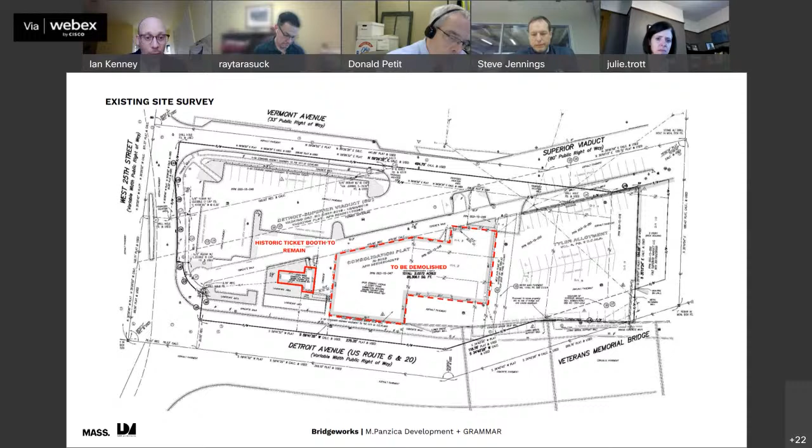And here it is. This is the historic ticket booth, and it's seen better days. But part of our proposal will be to restore this structure.

To set the site here, the ticket booth is the structure closest to West 25th, and the admin and garage building is further back on the site. What's important to note is that the garage building, the portion closest to the bridge, is actually cutting off access from the intersection of West 25th and Detroit Ave to the underbridge access, shown to the right-hand side of the page. As the bridge rises up and that existing parking lot sits at grade, there's an opportunity to get under the bridge, and we hope to open up the site for the public to move through it. Demolishing this building will be part of achieving that.

So here it is. We are proposing a mix of affordable housing and hotel programming, with generous public amenity on the ground plane. We hope to create a publicly accessible plaza and move the public through the site in a number of different ways, and to create a face of the project for folks arriving from any direction. This being a site with frontages on three sides, it's important that we create a welcoming face to the project on Detroit, on Superior, and on West 25th.

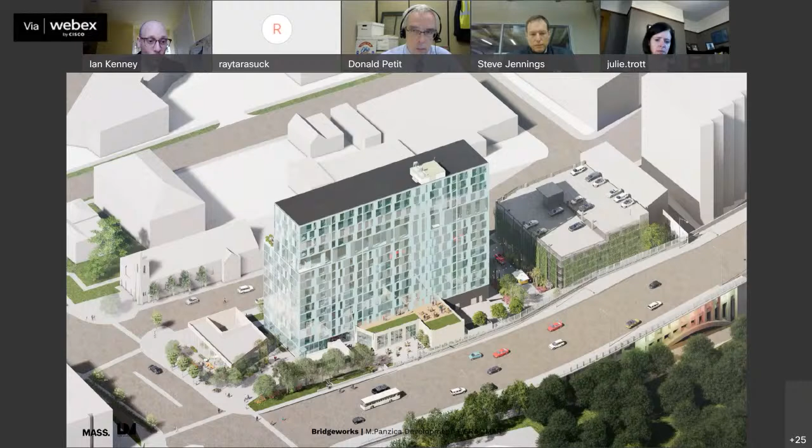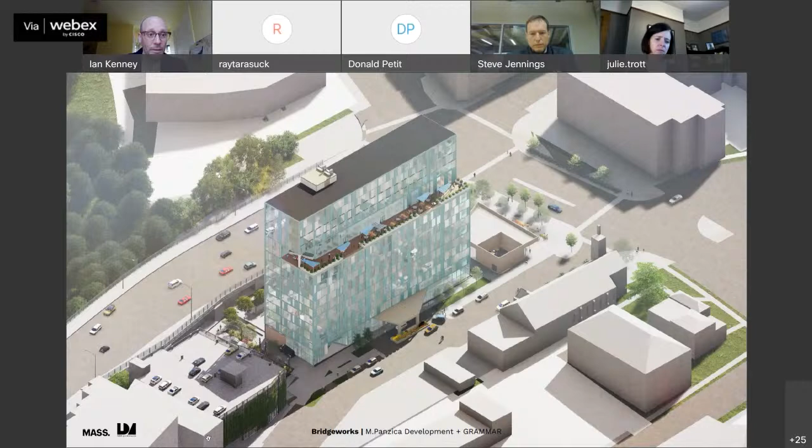Looking at the Superior Viaduct side of the building, this will be our main ground level entry. The hotel lobby and drop off will be right here. What we see on the bottom left of the page is the separated freestanding garage, a design that's evolved over the last year. By separating the garage, we're able to create a plaza that fully wraps around the residential and hotel building, increasing the public's ability to circulate through the site.

And here, as we look at the ground plane, the bridge is on the bottom of this page, and Superior is up top. We see the 1939 ticket booth remaining. What we're able to do here by demolishing the garage is allow the public to circulate from the corner of West 25th and Detroit on a hard and softscape plaza, bringing some of the programming outdoor in the form of cafe seating adjacent to our hotel lobby and coffee bar, and bring people down to that plaza to the page right.

The underbridge access is just beyond a little bump out of the bridge at the bottom right-hand side of the page. So to be able to move the public through the site and have people circulate, entering from a number of different directions, and open it up to all the adjacent neighborhoods, we thought was a really great opportunity that we want to make the most of.

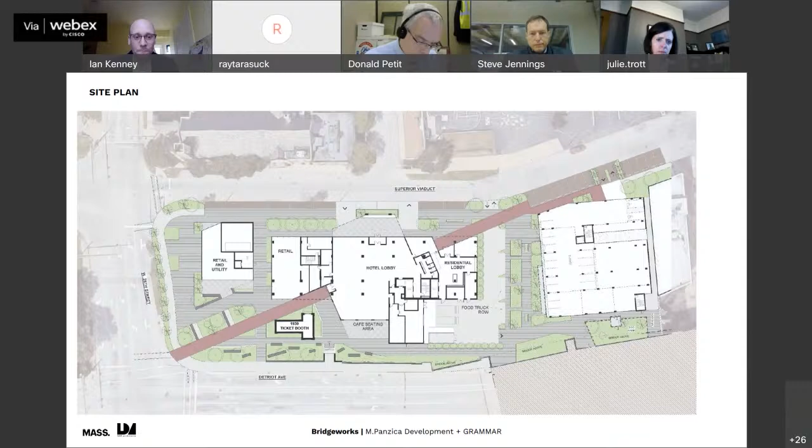And these are all images of the building that we are proposing to demolish. The one thing I'll call attention to on the bottom center is the face of this building, which is immediately tight to the edge of the bridge. If we go to the next slide...

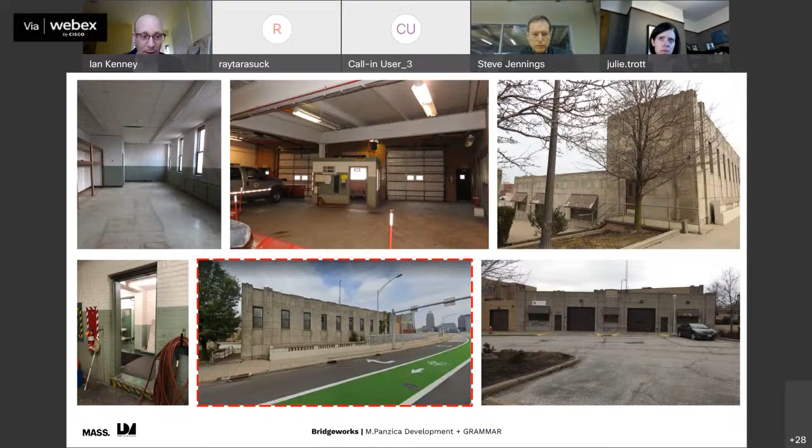So just getting a better look at the existing garage as it abuts the bridge. As you can see, there's no way for the public to get between the building and the edge of the bridge. To the right, there's a half stairway that brings you down to the plaza level. By removing this building, we'll be able to navigate the grade, getting from the bridge sidewalk down to our site.

If we go to the next slide, what we'll start to see is that as we study this building diagrammatically, there's some really interesting things going on. There are some interesting details, and we think there's a way to take some of the texture and detailing in the limestone that we see here, and use that to inform the design that we'll be proposing.

So as we go to the next slide, hopefully we can see how that is informing part of our design as it's immediately adjacent to the bridge here.

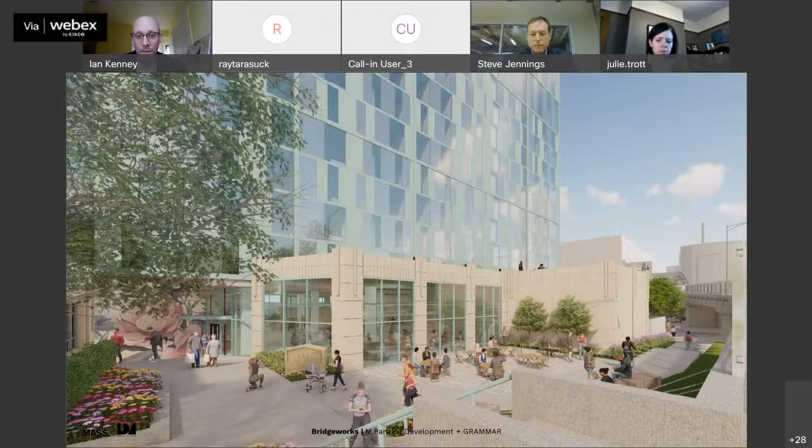And over on the ground floor, this is both looking into the hotel lobby and what we envision as a coffee shop with some spill out seating, hard and softscape landscape. You'll notice that the detailing of the building is starting to take some cues from the removed garage that we thought were pretty interesting and are a nice way to acknowledge the history of the site.

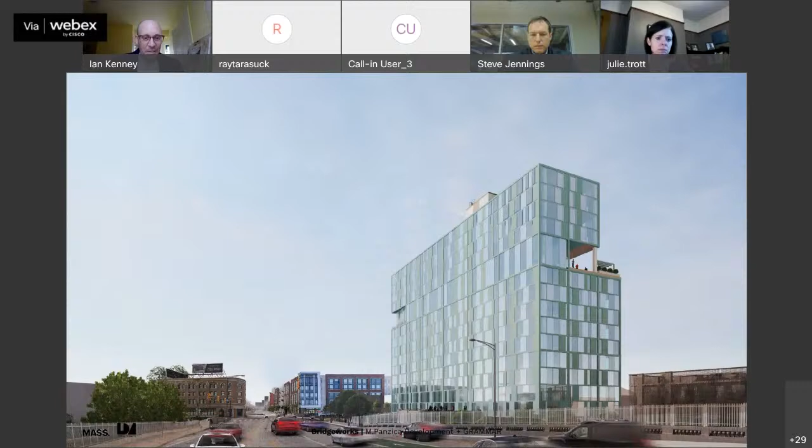A view of our project from the bridge, as you are leaving downtown Cleveland and coming into Ohio City. We are making carves and massing moves on the building that create different program moments. The 11th floor, where it sets back, is a restaurant, food and beverage program, and that will have a 3-season outdoor deck. We hope to make that a beautiful, active space with greenery, maximizing the length of the season for outdoor dining up on the 11th floor.

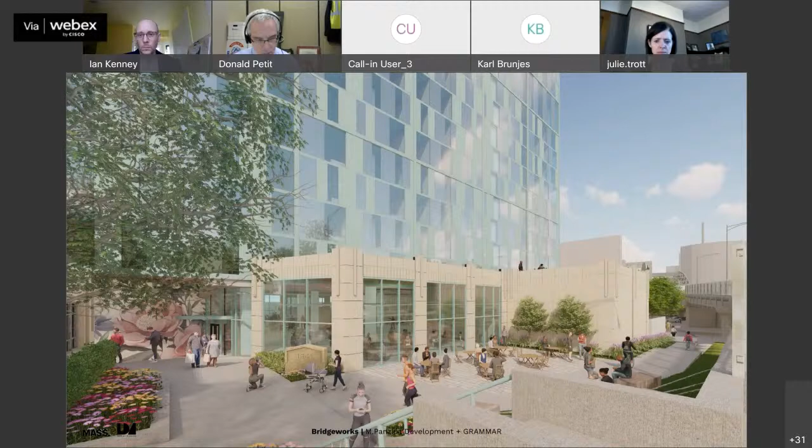We sent out the link to the commission so they could refresh themselves with everything that was discussed in whole for this project. We want to make sure that for this demolition, following our code, we're evaluating the architectural and historic significance of the subject building or structure, its significance in contributing to the architectural or historic character of its environs, the present and potential economic viability of the subject building given its physical condition and marketability, and the appropriateness of the new structure or use and its impact on the surrounding community. Hopefully everybody was able to look at the presentation from last time and this brief one here. This should have enough information to move forward one way or another on the demolition. Thank you.

Thank you, Karl. We'll begin with feedback from Giancarlo.

Yes, good morning everyone. Just a point of clarification—looking at this rendering in front of us right now, this lower facade, exterior facade, will be limestone and not the cast concrete we mentioned at the last meeting?

Yes, we heard that feedback, and I think that is the idea, that we're going to look at the different materials we can use here. Certainly limestone, we would love to do that, and we think the detailing could be really beautiful going that direction. Steve, do you have anything to add about the material palette on this area?

Per your request, Giancarlo, we did have a geologist test the stone and confirmed it is limestone, as you suspected. And yes, as Ian said, obviously we want to investigate all options, but per the direction from the last meeting,

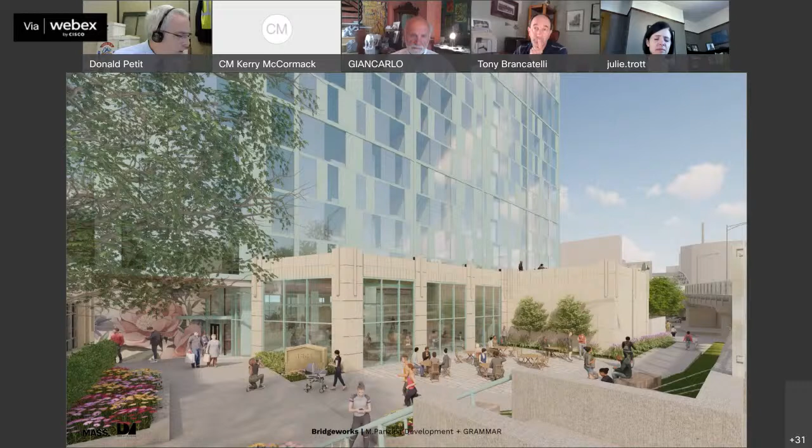Mr. Petit, do you have more to add? Thank you, Madam Chair. I just wanted to note that we did receive an email this morning from Laura Siraki from Hessler Road, who's concerned that the demolition, if we approve it, not be approved prior to final approval of the new construction and the project. She's concerned that we might lose the building if the project turns out not to happen. So I just wanted to make the commission aware of that.

Thank you. I was just reading that myself. Does the applicant have feedback? What is your intention with this approval? To move forward with the demolition immediately, or are you just requesting the demolition separate from your approval to get the assurance that the building can come down? Could you give us some feedback on that?

Yeah, I'll let the design team jump in. This is Graham Veysey, one of the owners. But yeah, we will not proceed with the actual demolition until we're ready to instigate overall construction on the project. So it'll be in tandem with the excavation, the earth retention system, and the foundation work. So what this allows us to do is continue down the path in order for us to get to a fall construction start. There's a lot of moving parts, as this commission understands, having firsthand experience in the architectural and design and construction world.

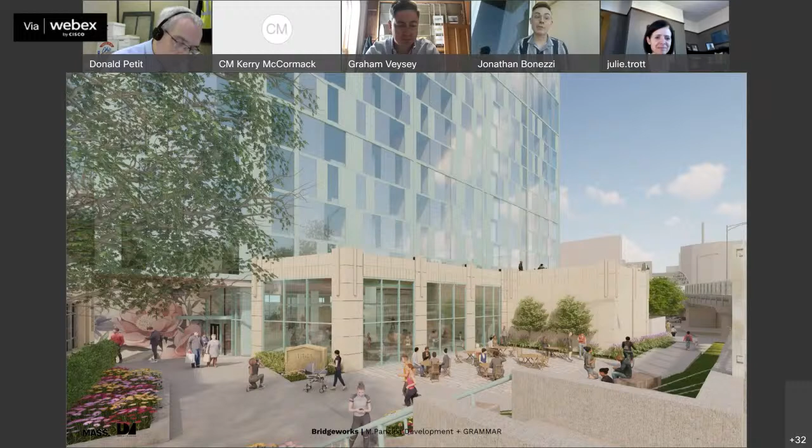One comment is for Karl. Thank you for bringing up those points about what to consider when there's a demolition. So for the record, we should comment on those. One being the architectural significance — it's one of the few Art Deco buildings, and Art Deco kind of missed Cleveland. But speaking to the building itself, we can all acknowledge it's incurred structural damage, it was hit by a car, and I watched that happen down the road. So it's incurred great structural integrity loss, and we're still keeping the ticket booth. I think you guys are very adamant and aware of maintaining the detailing of the original building to carry forward into the new design. So that's speaking to the architecture of the existing building.

The economic vitality of this new construction would far outweigh what is currently happening on the corner. So I think all those points connected, I would be in support of what's happening, given the careful attention to detailing being considered before the demolition. That would partly be a condition of mine — support would require careful documentation for the implementation forward. But otherwise, I'm excited for this project. Thank you, Madam Chair.

Thank you, Mr. Bonezzi. Other questions or comments from the commission? Mr. Strickland? Thank you, Madam Chair.

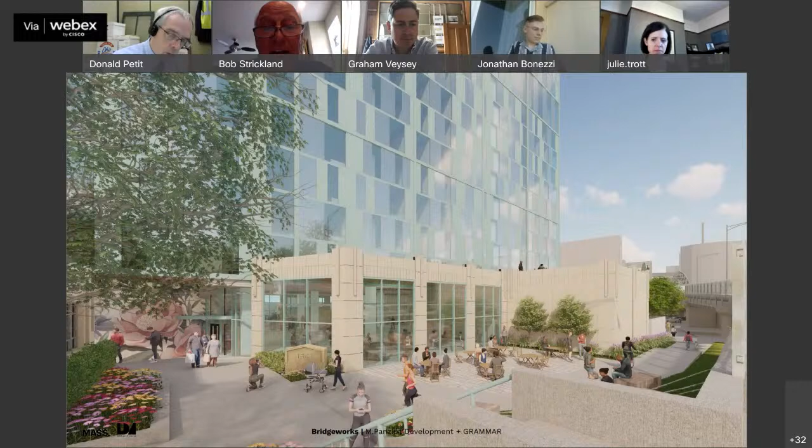I agree with all the points raised by my fellow commissioners. I'd just add a reminder that this project has gone through several design iterations, including several attempts to save this building. I participated in the tour of the existing structure, and I agree it's no longer a viable structure. The south face, facing the bridge, does have some beautiful limestone detailing, but the fact that they'll try to salvage some of that limestone for reuse in the ticket booth is commendable. I think this project will significantly add to the viability of this corner and the entire neighborhood. So I strongly support it.

Thank you, Mr. Strickland. I'll state my feedback at this point too. It looks like we're not having as many hands up from the commission. I would echo many of the comments that have been made. I gave my opinions on the building's new design last time.

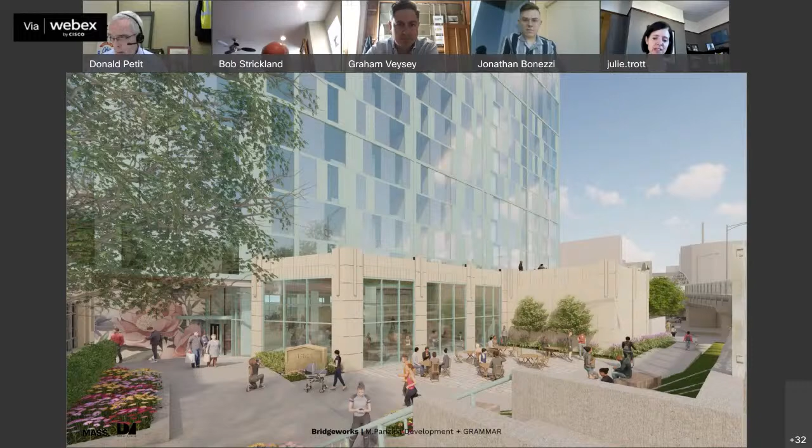Regarding the demolition, I do appreciate you wanting to salvage and or replicate the detailing so that it can actually be appreciated more by the public than it currently is, as close as it is to the bridge. I also appreciate that you're trying to open up access to the lower bridge to the public, because right now it's not very accessible or known. The more we can celebrate that and make it a known entry, I think would be excellent. So the more you can do that as you develop the design, by providing some information at the street front, I think would be good, so people understand what you're doing with this project and what you're trying to allow them access to.

A final comment — have you thought about how you connect to the Metro Park trails? Especially with the bridge being out in the flats, your site is the major access back to the Metro Park trails. So as you finalize your design, making it bike-friendly and pedestrian-friendly to connect to the path directly across this intersection, I'm sure the public would appreciate it even more. But as stated, that was sort of a meandering comment. I do support the demolition of the current structure with the condition, as stated by Mr. Bonezzi, of careful documentation of the building detailing for replication and or reuse.

Ms. Anderson? Thank you, I have a question. Has there been any initiatives to make that space under the bridge usable for events and accessible by pedestrians? I've been down there and it's cool, but there are holes in the concrete you can see below, and it's not really in a condition that allows it to function. So I was wondering if there was anything going on to change that.

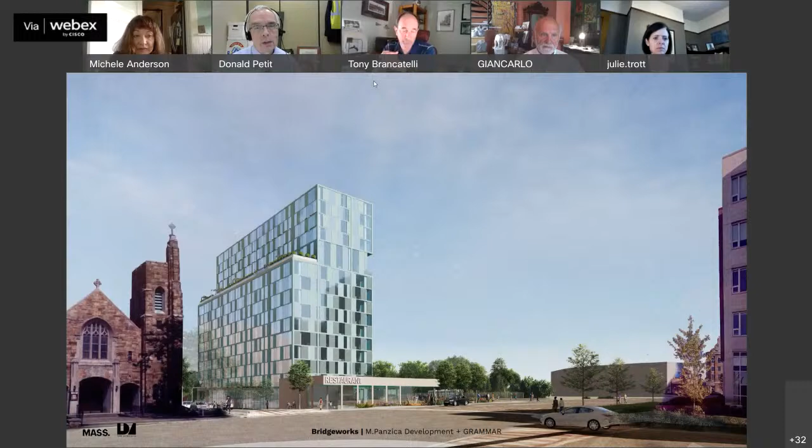So how far are we from the final presentation for the new building?

Would the applicant like to answer that? Yeah, Steve Jennings from LDA can quarterback the timeline for us. We intend on coming back in July for the final presentation. And the initial construction, demolition is planned for October of this year.

Okay, so then they can wait until we have a final approval. Can I just weigh in here for a second though? I think that from an ownership perspective, the approval of the demolition allows us to confidently move forward with developing the drawings for this project. As you all know, there's quite a bit of drawing to be done with design, development, and construction drawings.

So I think that, Steve, weigh in here, but I feel like it would be okay to wait for the actual demolition before the drawings are approved, but waiting for demolition approval for the rest of the concept would just potentially delay us more. If that makes sense.

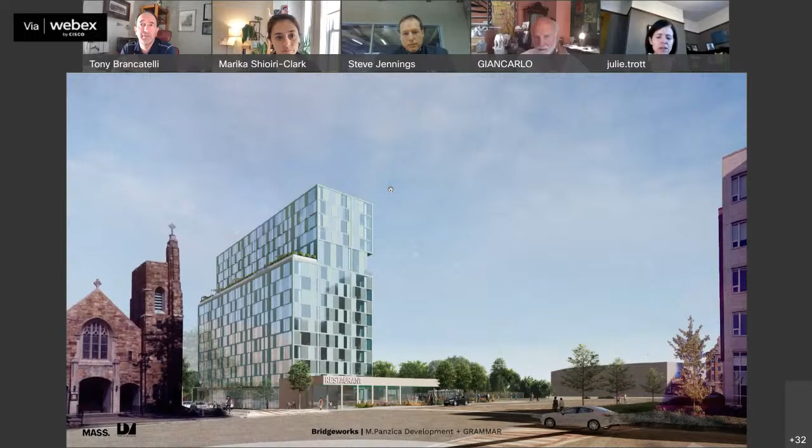Yeah, I think that's the tricky verbiage on that, just because of how complicated that is. So we will in tandem commence construction, which will include the demolition, which will mean that we'll have to have approval on the overall building. So we're not going to demo the building before we have full CD sets and approval from the city to move forward. So I think we're all saying the same thing, but just talking past each other.

And I think the actual word 'financing' is a pretty loaded word. I would just agree with Tony and say let's not have that word, but have the commencement of demolition be aligned with the commencement of overall construction of what you guys are seeing in concept now and what will come back to you in July.

Yeah, and I would be happy to amend, Madam Chair, to include that the construction plans be approved and design approved. I just did not want to have the financing caveat as part of that. Okay, so you'd like to add the condition that demolition cannot occur until complete approvals are received from the city? Correct, only. Okay, Giancarlo, do you agree with adding that condition? Yes, I second that. Okay, excellent.

So we have two conditions that have been stated with the motion related to the demolition of the one building or the buildings. Any further discussion?

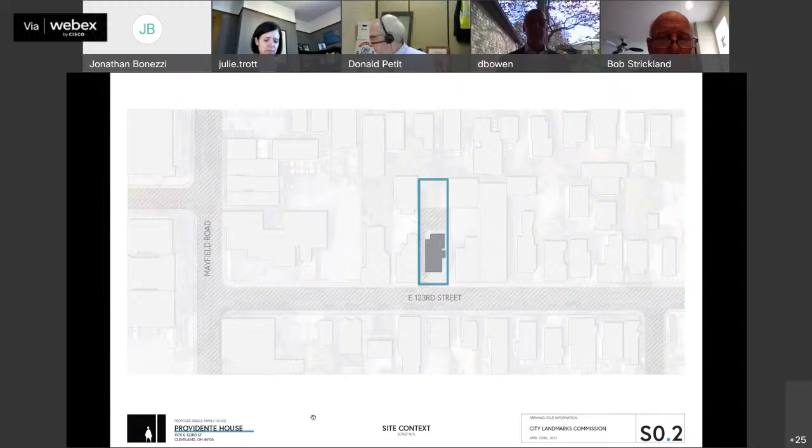Next slide, please. This shows you the house that was taken down before and the location of the house, but it's been demolished and the foundation stones have been stored in the backyard. Next slide, please. This shows you the new footprint of the new structure.

As we talked about before, we changed the hand of the project itself. So the pedestrian entry to the house is on the left side instead of the right side. And we did that because the upstairs balcony off the bedroom had a better view. What we did was we took up a drone and we took it up at the height and showed Christy what it would look like from both sides. And she agreed that when we went through design review, we take a look at both, flipping it. So we did flip it as what was suggested at design review.

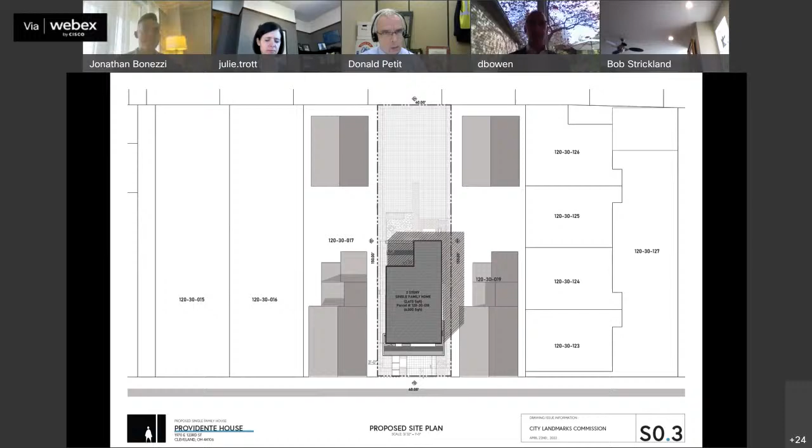This is basically in the same position as the house that we tore down. One thing you can note is that the common living spaces with the kitchen and the dining room, and the bedrooms, have that relief between the two structures next door, which are very large. This shows you the first and second floor.

This has stayed basically the same from what you've seen before. Next slide, please.

This is a close-up of the first floor. We've kept the garage in the same place. At design review, there were 2 dissenting votes because of the garage being in the front. We looked at doing it somewhere else, but because of program and impervious area, we thought for the ecology and for the use of the person occupying the space, this was the best solution. And as we talked before, the garage door is totally concealed and will be flush with the rest of the house. Next slide, please.

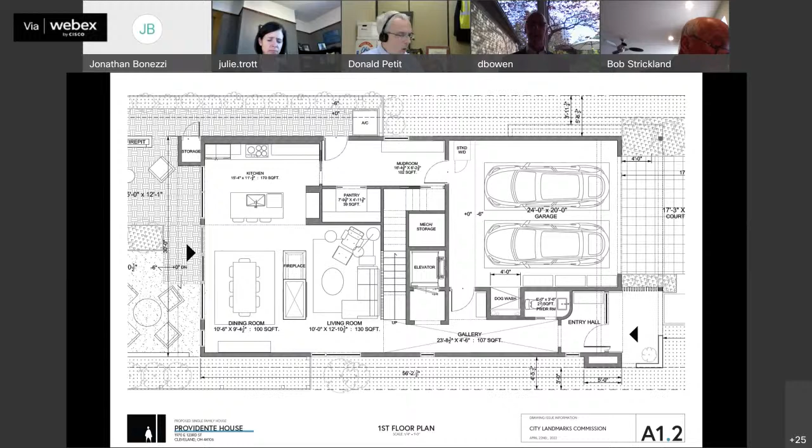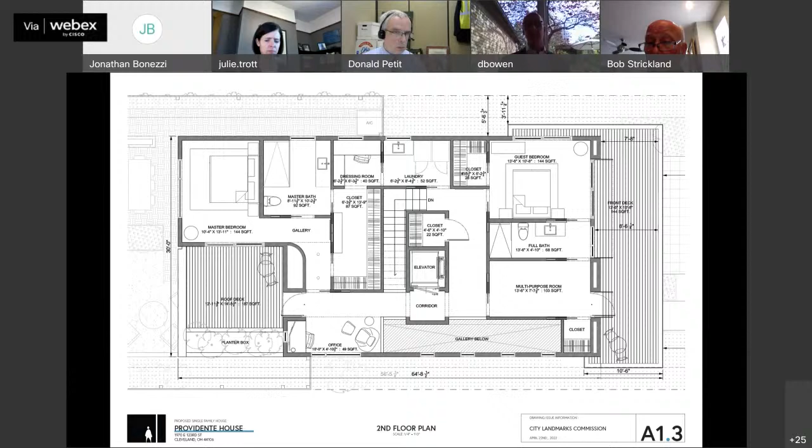This shows both balconies, the one in the front, which is gracious and gives you a lot of ability to be on the outside of the house by the front sidewalk and to enjoy the street. And then also the solitude of the back patio or balcony, with the lush green space below. Next slide, please. This gives you the elevations.

One of the comments that was brought up, there's a couple of comments. One was exposing more of the glazing. And what we did, taking the cues from Landmarks, was lower the railing of the balcony and put a steel railing on top of it like we did with the back, which exposes more of the glazing. It also enabled us to pull back the sheath wrapping down by the entranceway, away from the front door and the glazing next to the front door.

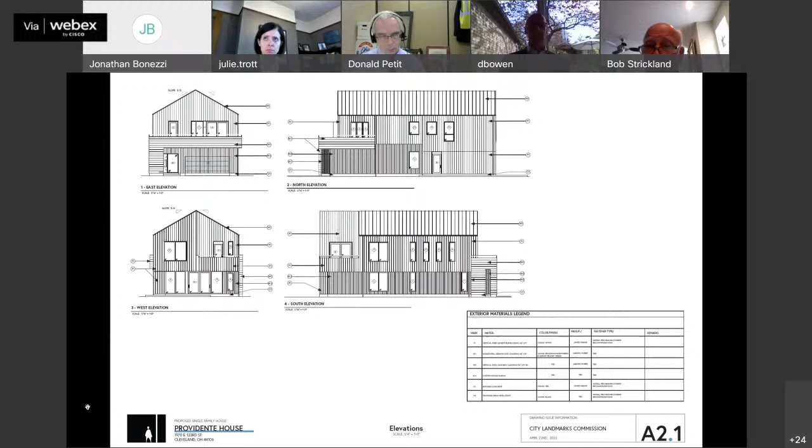Next slide, please. This was a slide we used before, and it just talks about the fronts of buildings, so I'm not going to go through that one again with you.

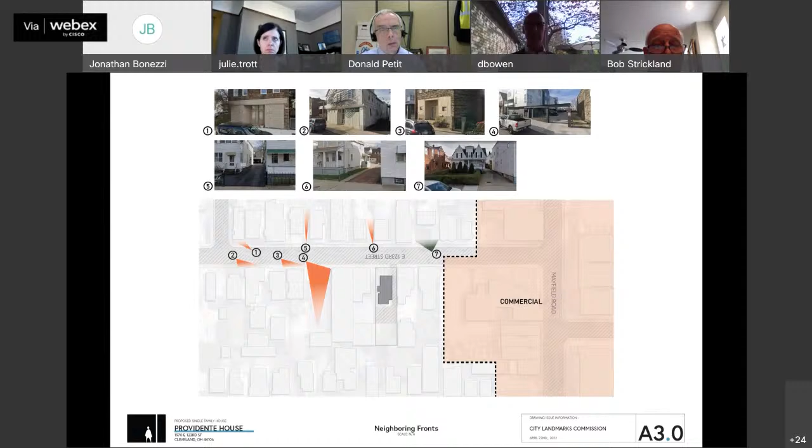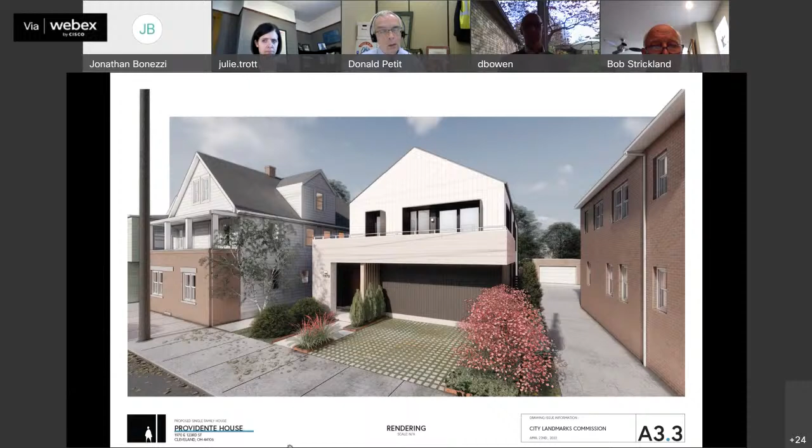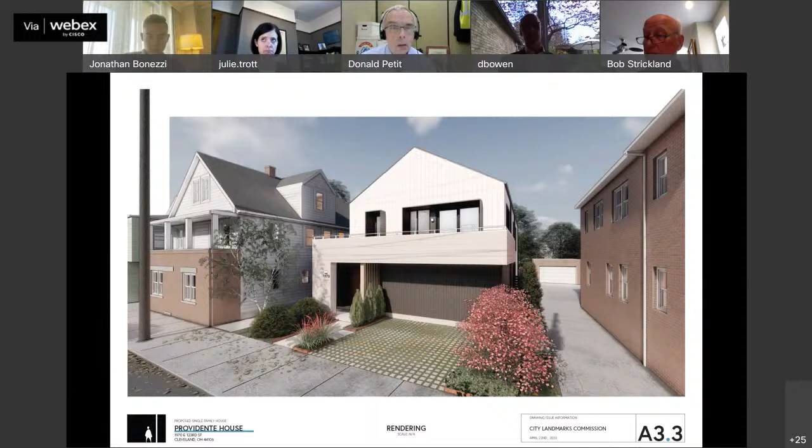This is the other angle. You can see with the house set back a little bit, it gives some of the living space in the back of the house some more relief. One thing you don't notice on both sides is there's almost no impervious area—I mean, very little green space. So this will be a nice little oasis between these two structures. Next slide, please.

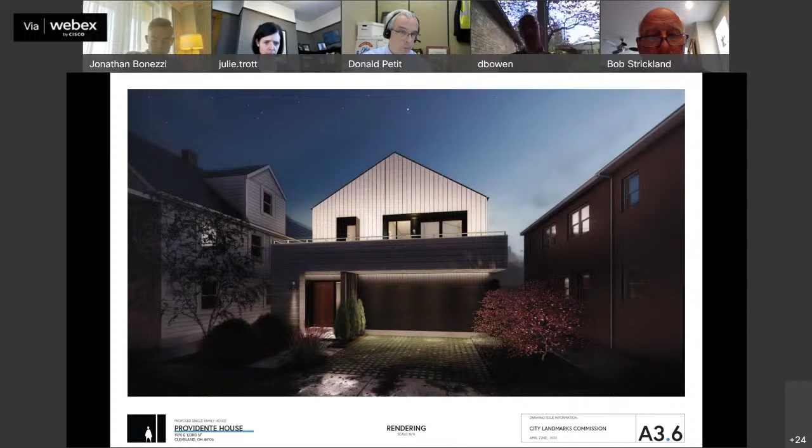Night shot. As you can see, there's two sconces that I showed you in an earlier slide. The rest of the lighting is concealed—it's LED concealed lights. Next slide, please.

So, Don, I think you're going to go through design review comments. That's correct, Madam Chair, if we're ready for that.

Ray Christosik couldn't attend the meeting today. He did send a report this morning. The Little Italy Design Review Committee approved the project with some concerns over the front-loaded garage and the double-wide driveway. I don't have the vote totals, but the applicant has testified that there were 2 dissenting voters. It was 5-2. So it was approved.

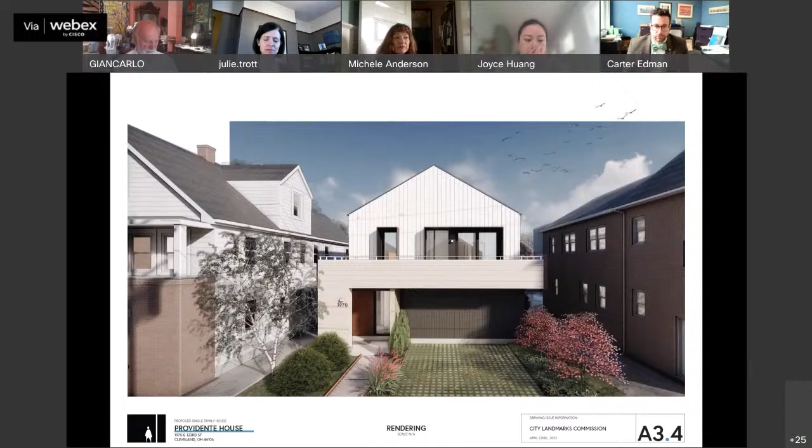Mr. Strickland: Thank you, Madam Chair. My question has to do with zoning. It looks like this covers much of the site in terms of side setbacks. I wondered if any side setback variances will be required, and if it would be appropriate for Landmarks to issue a letter of support for those variances if they are required.

Thank you for your question. I sent it to Rick Riccardi a couple of days ago so we can get a full read on the zoning, because going in front of BOZA takes some time—there's a two-week notice period and they have a pretty full agenda. Right now we think we're fine with lot coverage and everything, but having the garage door in the front, we may need a variance for. We're verifying everything with Rick Riccardi right now, so we've submitted it for that zoning approval.

So you're unsure of what variances yet? You're just anticipating the front load garage will be your one variance? Yeah, right now that's what we think it is.

Okay, thank you. Madam Chair, I think this is a very handsome project. It fits well within the neighborhood, even with a modern design flair. So any assistance we can give in terms of a letter of support regarding any potential variances, I'd be in favor of.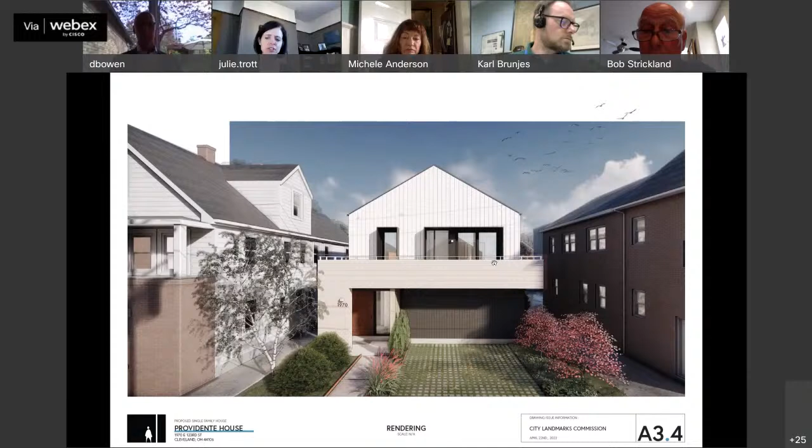All right, are there any other questions or comments, or would someone like to put forward a motion? I move for approval.

Any conditions? I can't think of any now. I'd like to make a condition that the Landmarks Commission support any variances required for the building of this structure. I agree with that. All right, excellent, so we have a motion, with the recommendation of support of any variances. Do we have a second?

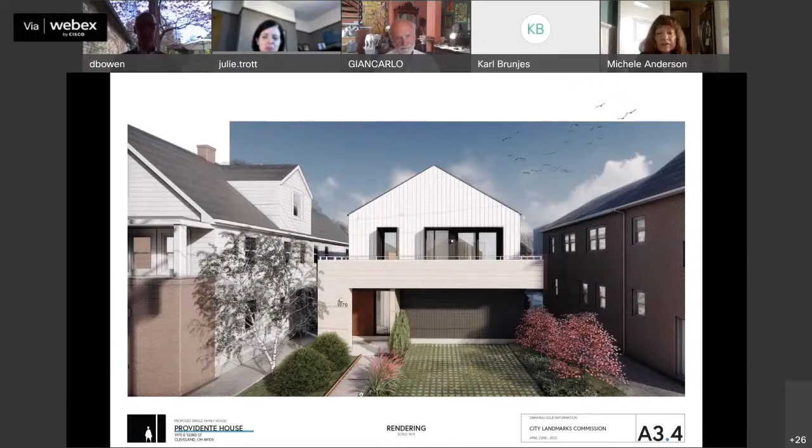I'll second that. All right, thank you. We have a motion, we have a second. Any further discussion? Mr. Brunjes, you have your hand up—is there something we should review before we move forward with the vote? Nope, I blanked out there, sorry. Okay, trying to make sure I'm getting everybody. Any further discussion?

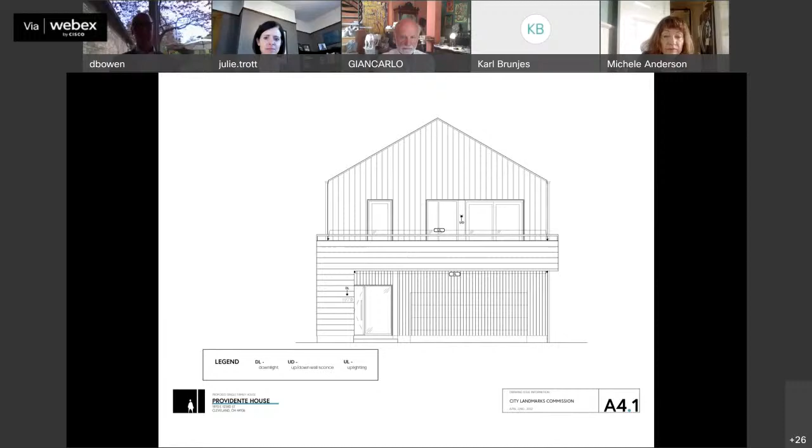All right, Mr. Petit, please call roll and announce the results. Thank you, Madam Chair. Mr. Bonezzi has recused himself. Ms. Anderson, yes. Mr. Brancatelli, yes. Mr. Colicchia, yes. Mr. Dryer, yes. Mr. Edmund, yes. Director Wong, yes. Mr. Strickland, yes. Mr. Tarasik, yes. Ms. Trott, yes. The motion passes unanimously with one recusal.

Excellent, thank you very much, and I just want to say this process has been great. I think the house is going to be a better house because of the process. I appreciated everyone's comments, even though we might not have taken them all, but it's a better structure because of it. Thank you very much and have a wonderful long holiday weekend. Thank you, you too, thank you.

We'll move on to our third applicant, the Woodhill Development Site, located at 1885 Coltman Road and 1862 East 123rd Street. I'd like to welcome the applicant. Please, you're welcome to unmute your mic, announce yourself, and tell us about your project. But before we do that, Mr. Petit, you have a comment?

I just want to remind the commission that we approved this project almost a year ago, on May 27th of 2021. They're returning today with the final design of the landscaping, the sculpture park, and the signs for the apartment building.

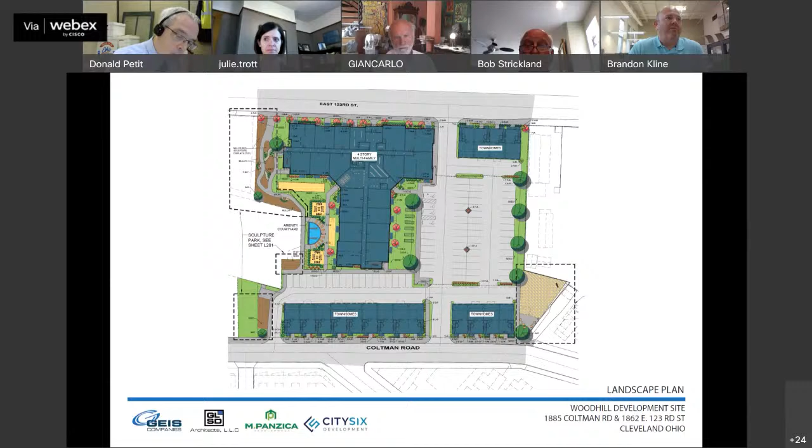Next slide. Zooming into the sculptural park, we have a meandering path that connects from East 123rd to Coltman Road. In that area, there are multiple locations for future artwork, along with a couple of artistic, decorative, and bold outdoor pieces of furniture that'll be placed along that pathway for the public. You can see the Riptide bench to the left, and the Riptide chair down in the bottom.

Next slide. Jumping over to the dog park area, there's an outdoor seating location using a kind of clamshell-looking statement piece, in an orange and silver look, trying to create a bold, eye-catching opportunity allowing the public to gather outside the dog park area. You can see the gravel demarcation is the location of the dog park. The dog park was included in the final presentation previously, but we're just coming back with the outdoor seating for those locations.

Next slide. This part of the presentation is just for the commission's awareness, to understand what will be presented and finalized from the Sculpture Center's efforts — some locations and types of art that will be scattered throughout these spaces. This key plan shows where some of those locations are along the building and scattered throughout, and it'll be highlighted in the next few slides.

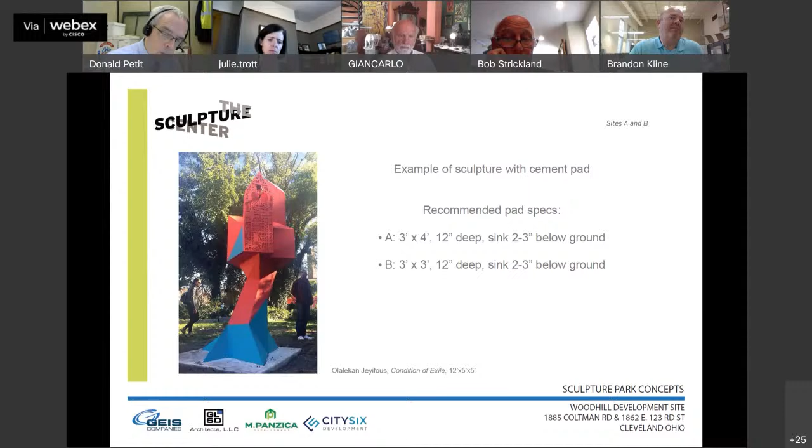Next slide. There's some discussion about creating some larger sculptures within this as well, again 3x3, 3x4 areas along the pathway. Next slide. Some of the larger context that could happen.

Next slide. Some of the playful aspects that could come along that same area — this is in the center space of C. There's also another slide for site C that's a little more interactive for kids and people. This installation could run overhead over the path, creating a nice wind chime-esque type feel.

Next slide. This could be another use of space — these are kind of small mini tables that can turn into almost a playground for the kids in that area. Maybe a little smaller scale than this, but these are the things being contemplated by the sculpture park.

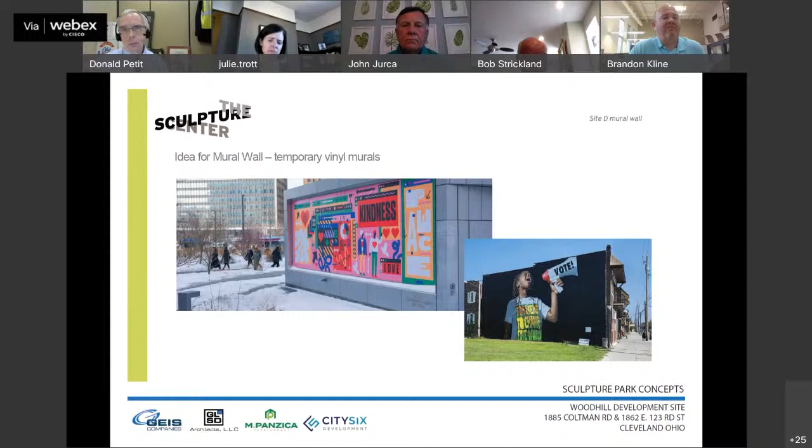Cleveland area mural. Next slide.

On the backdrop in the center section of that pathway, the idea is an amenity wall that can be interactive for kids and people along that path. This would be adhered or fastened to the backdrop of University Circle's building—a very interactive sculpture park connecting East 123rd and Coltman. Again, these are not representations of the final installation; we're just trying to earmark locations for where these potentials could be.

To close out the construction aspect of this portion of the project, the Sculpture Center will work with their commissioned artists to put together an actual sculptural package for your review in the future. Next slide.

And then lastly, the signage of the apartment building. We went through a large process of looking at what I'll call Italian typologies of fonts. What we felt we came away with was a modern Italian look, but also with a little bit of a classic throwback. The name of the project will be branded The Monroe.

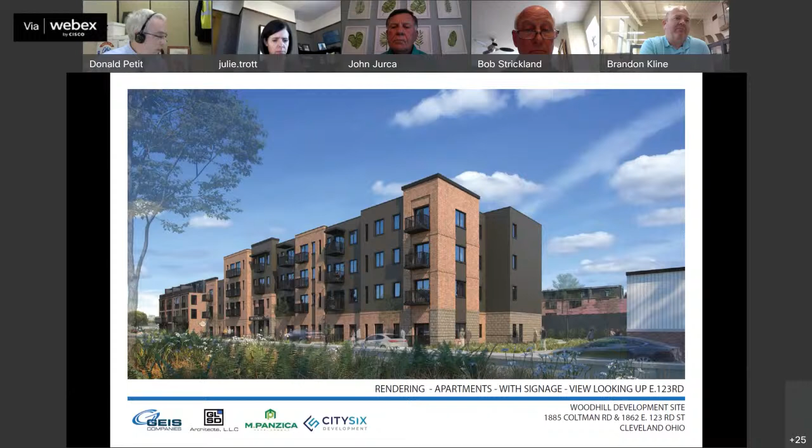And here's another view from closer to Euclid, looking back at the two signs. Happy to answer any questions.

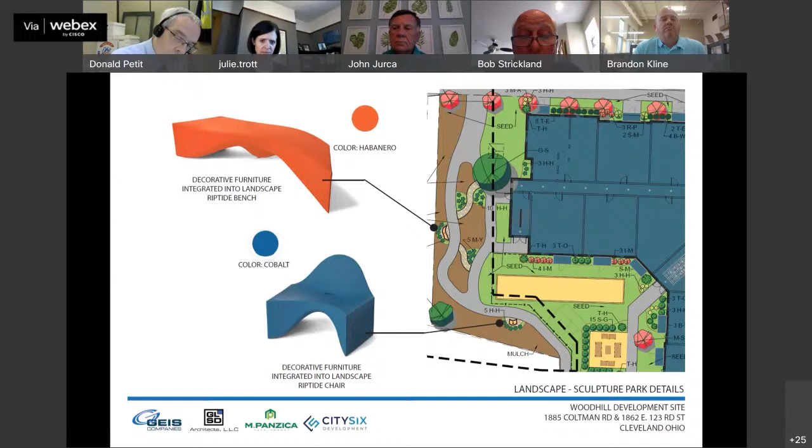I noted that some of the concrete bases for some of the structures were identified as 12 inches deep. Some of the sculptures look fairly large, so I just want to make sure there's appropriate engineering of those foundation bases for the larger sculptural structures. And I heard Brandon say the sign was a post-mounted sign, but it looks like a wall-mounted blade sign to me—I just wanted clarification on that.

But yeah, I meant kind of a cantilever post, but yes, blade would probably be more appropriate terminology. Thank you for that clarification. That's it, thank you. Thank you, Mr. Strickland. Ms. Anderson?

Thank you, Madam Chair. I just want to say that I really appreciate the signage. I think it's very elegant, very appropriate to the building. And as a real estate agent, I truly appreciate good signage, so I know I'm in the right place.

And I just want a clarification on the sculpture garden. In reading and based on your presentation, will the sculptures be changing? Will they be there for a certain amount of time and then something else comes in? That's kind of the way it sounded. So if you could clarify that.

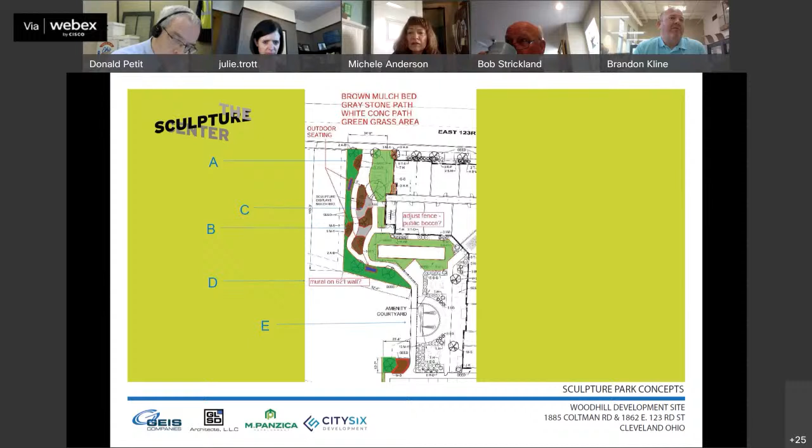Potentially, the sculpture center is going to be kind of monitoring, running, and handling this aspect. We're kind of handing this land and area over to them to commission and swap out as they feel appropriate. The land or the development team has full review rights over that aspect, and any changes that occur through there would, I believe - and Don and Carl, please correct me if I'm wrong - be subject to resubmission and review of this commission.

I apologize, this is Brad Nosan from the development team. In our discussions with the Sculpture Center and Director Chin there, I believe the intention is that these are semi-permanent exhibitions which will rotate every so often or frequently. The idea, if that is feasible, is that you can have rotating exhibitions for people to come visit and have another reason to come down to the sculpture park to see the new installations.

I would assume the intention is that every time we have a new grouping of sculptures - and this may be once a year, it's all kind of budgetary constraints - we would then come back to landmarks and get those necessary approvals, if that makes sense. That's what I wanted to know. Thank you.

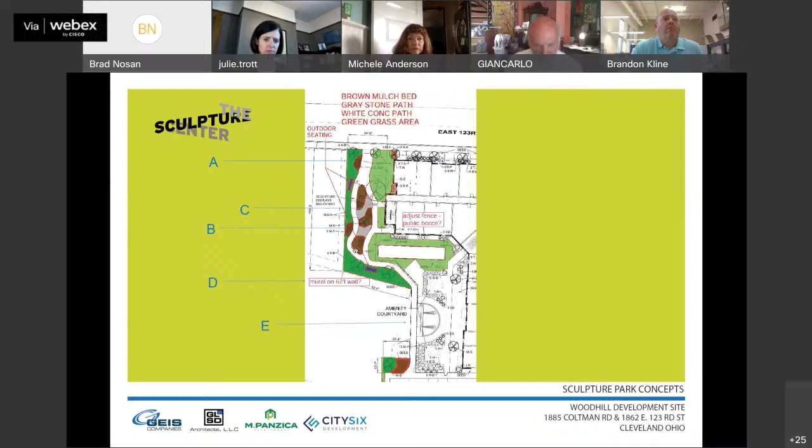Thank you, Ms. Anderson. Giancarlo? I'm curious, what is the affiliation between the development and the sculpture center?

Merely a partnership. We submitted an RFP for the site when it was owned by University Circle Incorporated to develop it. One of the ideas we had is that we could work with the Sculpture Center to help them. The development could earmark some land to provide a sculpture garden, and then the Sculpture Center would be able to curate, if interested, the various sculptures on site. We could attempt to help them with fundraising efforts if necessary, to use that as an outdoor gallery.

So the space could be an exhibition space for sculpture shows, with continuous engagement from the Sculpture Center with the project. Correct, yes sir. I think initially we proposed a 5-year license for their use, and there would be no reason not to continue that into perpetuity, so it effectively becomes an outdoor gallery for them. No, I think it's a great idea - it keeps the whole space living into the future, changing and transforming.

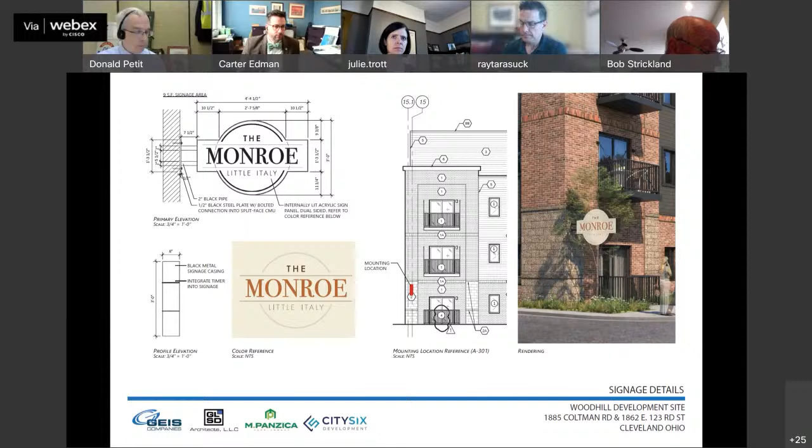We'll move on to our next applicant, the Ukrainian Museum and Archives located at 1202 Kenilworth Avenue. I'd like to welcome the applicant. Feel free to unmute your mic and announce yourself and tell us about your project.

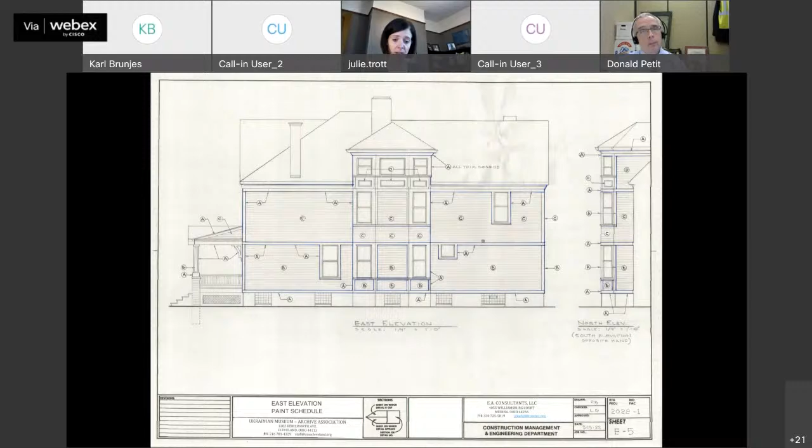Okay, then you have the updated materials. Excellent. Do you also have the photographs of the existing building? Yes. Mr. Brunjes started with that so we could become familiar with the building.

Anything else with your presentation, or did you just conclude? I think we can conclude our presentation unless you have questions or discussions. Okay, well then we will move on to feedback from the local design review, and then to the commission's questions. Thank you.

Do we have feedback from the local committee? Good morning, Madam Chair, this is Michelle Davis with Tremont West Development Corporation. The local committee met at the Ukrainian Museum and approved everything that they have proposed here today.

They did have reservations though about part of the presentation, that they want to paint the railings and all of the columns on the front. Losing your audio, Michelle, we're having a hard time hearing you. Can you hear me now?

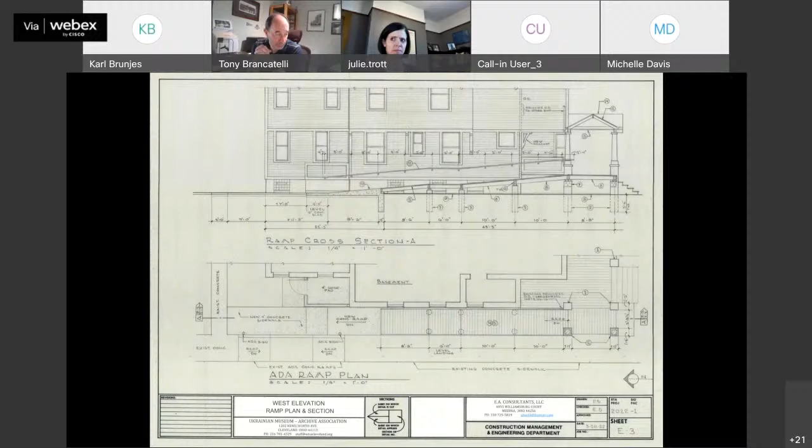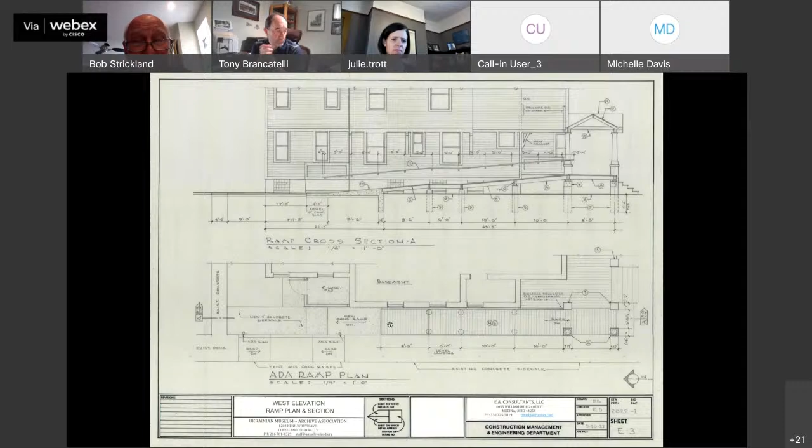No further questions, Madam Chair. Thank you, Mr. Strickland. Thank you, Madam Chair. So I live in Tremont and I go by this house, this museum, often, and I really enjoy the color palette that they've used on the house.

But I wondered if those colors have any history behind them, if any investigation had been done either through photographs or trying to excavate through several years of paint to find out what the original color scheme may have been.

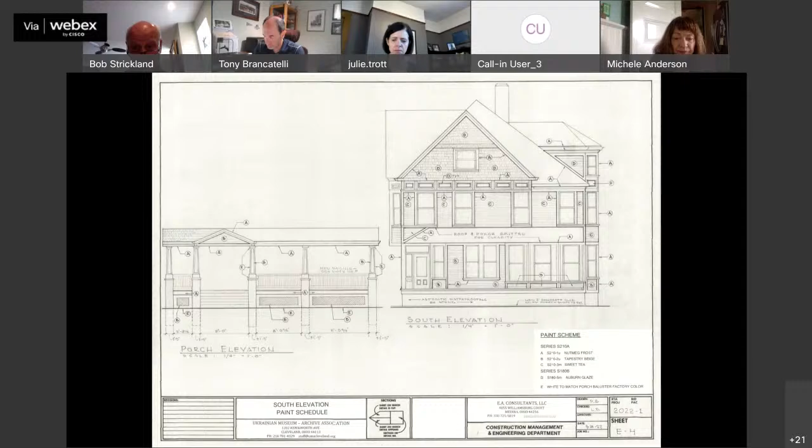Regarding the front door, you mentioned that you will be replacing that door, and I don't recall seeing any renderings or photos of the replacement door. I was wondering about the design and the materials. The door and the glass will match the existing front door as it is.

What we're going to have is the same thickness material and all that, the same design, but it's all going to be insulated glass and upgraded for security with locks and reinforcement. So the appearance, as you see it on the elevation of the drawing, is how it's going to be, which is how it actually is. So it'll be fabricated from wood? Yes, solid wood.

Thank you. You're welcome. Thank you, Ms. Anderson. Mr. Edman?

On the white color for the railings, I think white is not inappropriate, and I understand about making it pop and giving it dimension against the background colors. The color palette feels very appropriate, but the selection of the white is going to be really important to making that work. If it's a cold, bright white, it's going to feel incongruous and ahistorical. If it's something a little richer, a little warmer—not necessarily quite ivory, but like a West Highland white kind of color, if you're looking at Sherwin-Williams colors—I think the exact selection of that white is going to be really important to making that porch work the way you're hoping it will.

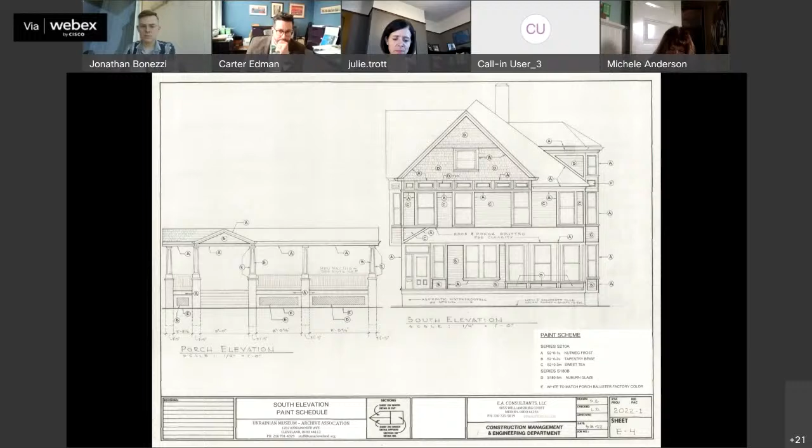There's no feedback that was given on the ramp. I think previously, trying to blend the design with the pickets, if it works with the front porch, simpler is better. Did we talk about the color you were going to paint that pipe rail with the pickets?

A good question, I haven't really picked it. I don't want black because that just doesn't tie into anything in a house. I was thinking an off-white, or it could be the trim color that we have on the house, so it blends with the house. Because you don't want it to really pop, it's just there. It's a necessity, and you want to minimize the impact on the visual, I think.

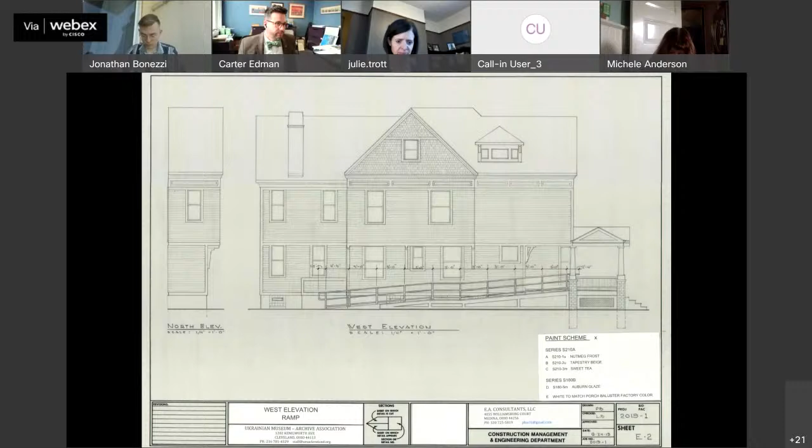We would agree—I would personally agree—having it blend in with the house would be our recommendation, and using the colors that are already there minimizes the attention to that ramp. It is a necessity, you are a public facility, so I think people understand it, but blending with the architecture would be my personal recommendation.

So done. Make it a condition that you submit that also to staff, for whomever makes the motion here in the near future. Very good. Consider it done. Okay.

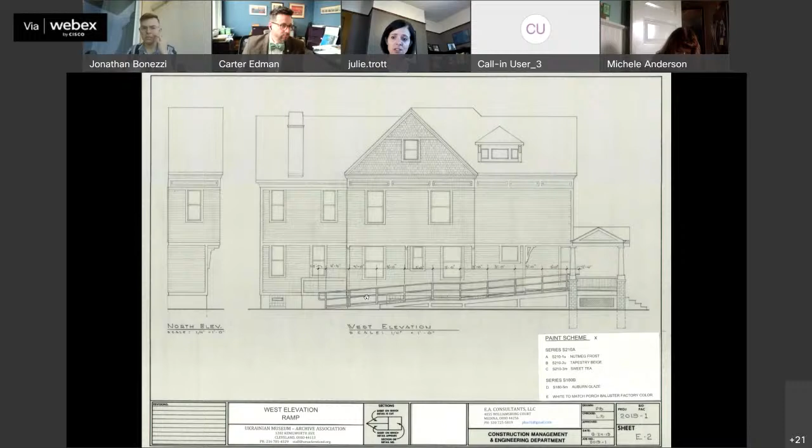So I just want to make sure we've talked about everything: the porch renovation, siding, and the access ramp. I don't have any issues personally with the Hardie board replacement, and appreciate that you're using a higher scale material than vinyl with this replacement. Thank you. Other questions or comments from the commission, or would someone like to put forward a motion?

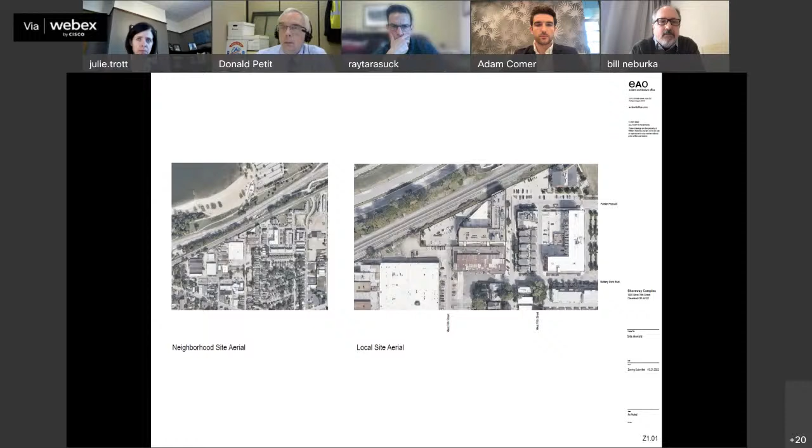Next slide, please. The current configuration of the site is the Shoreway building, the L-shaped structure there on the right. There's a triangular portion that is a one-story covered parking area, currently used for parking. The rest of the site is surface parking right now. Next slide, please.

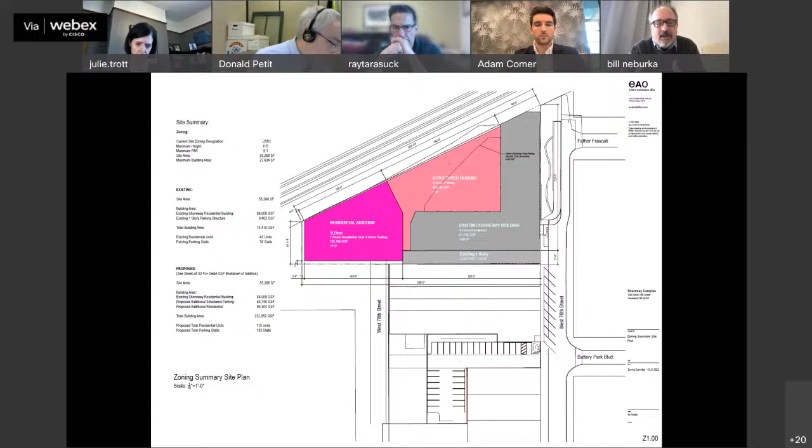The approach of the project is to create this addition to the Shoreway building, a historic structure. Our approach is to create a freestanding addition, indicated by the dark purple on the left, and then knit the two together with a podium of new structured parking to provide the parking required for the site. The little rectangular slot at the bottom of the L-shaped Shoreway building is an existing one-story covered causeway, covered in, I believe, 1956, roofed between the Shoreway building and the Tamura building just to the south. We're looking at that as a potential new connector and unifier for all of the structures, creating a complex of like-scaled buildings. Next slide, please.

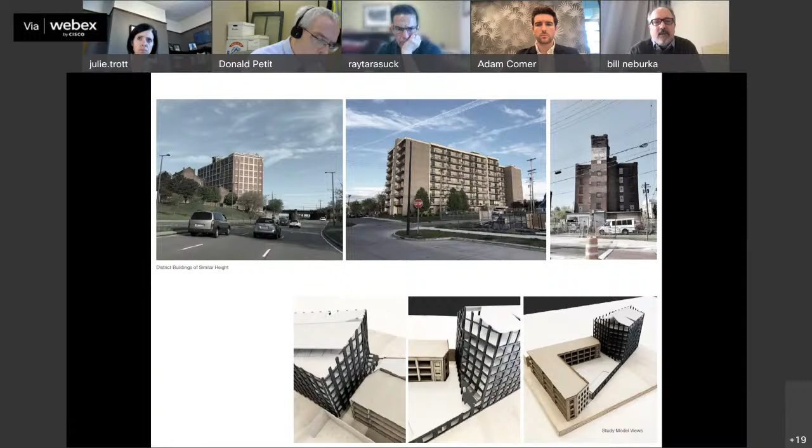The scale of the project exists within the neighborhood. The Westinghouse complex on the left is something we've been looking at, asking how do we knit various scale buildings together, a residential building and a warehouse building, all about the same scale height we're looking at. Below are some quick study models we've been using to study how these shapes go together, so we're not obstructing views from the existing building, and how we start to make these complementary to one another.

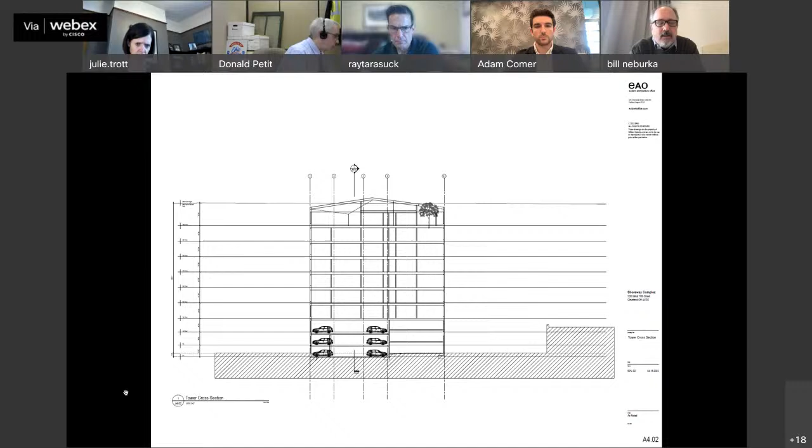I think that might be it. Maybe there's one more. That might be it. So I think what we can do is, and Adam, unless I missed something you want to chime in, we can just open it up for questions.

No, I think you covered everything, and we look forward to answering some of your questions and taking some of your feedback.

Excellent. Thank you for the presentation. We will begin with feedback from the local design review committee.

This was reviewed by the Gordon Square Clifton West Local Design Review Committee on May 11th. There was some discussion about the uniqueness of the roof line and that it seemed to float out there. They discussed parking, that the parking is more than 1-to-1 for this project. They'd like to see more views from different locations and pedestrian sight lines. They want to see what the visual impacts on the Shoreway building and the powerhouse were. They requested solar studies, a migratory bird study, and a stormwater quality study.

They asked if there could be possible landscaping to buffer the garage. They asked to keep looking at the scale, the massing, and the shadows cast on the existing building, which they have done here. They asked to look at the materials and how it relates to the building and the battery park as a whole, as they need to speak to each other, to possibly look at a brick podium, and asked if the height could be supported. The Shoreway did receive historic tax credits as part of the renovation, but we are outside of the 5-year look back period.

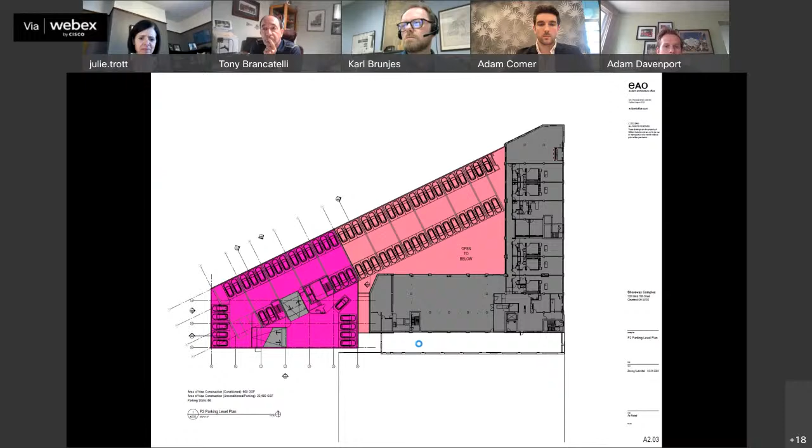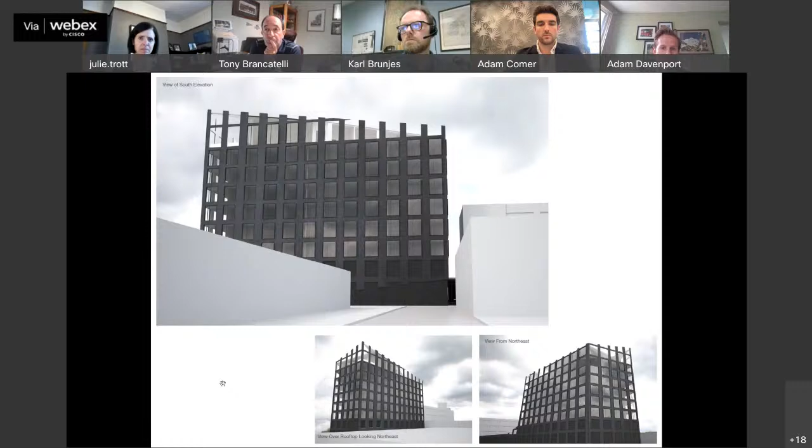Thank you, Madam Chair. Adam Davenport from City Planning. Karl highlighted the two variances that this project will need if it moves forward. The classic floor area ratio variance, which almost every new house in the city of Cleveland or on the near west side receives, speaks to the lot area in relation to the livable space area. The rear yard was also highlighted by Karl, which speaks to single family houses requiring a rear yard so it doesn't take up the entire lot area. Since this is on the same parcel as the Shoreway building, that's why the rear yard was highlighted as well.

Speaking to the broader zoning context, this is zoned the same height area as Battery Park and a lot of the industrial area to the west, north of Lake Avenue, south of the Shoreway, in the general industry, semi-industry area over there. It is right on the edge of the form-based code pilot as well, and the height district wouldn't change, so the same height district would be applicable here. Happy to give any other comments and viewpoints from the city planning aspect if necessary. Thank you.

Thank you, Adam. Don, do you have additional feedback from community letters? Yes, thank you, Madam Chair. We received 3 letters this morning from 3 members of the community. All of these letters have been shared with the commission. I do think it's important to note them in the record.

We received 2 separate letters from Abby L. DeMaio and William DeMaio, who live at 1253 West 76th Street. Ms. DeMaio was concerned about the proposed height and the mass of the building. There's a concern that if this project is allowed to build at 10 stories, it opens the door to other additional 10-story projects in the neighborhood.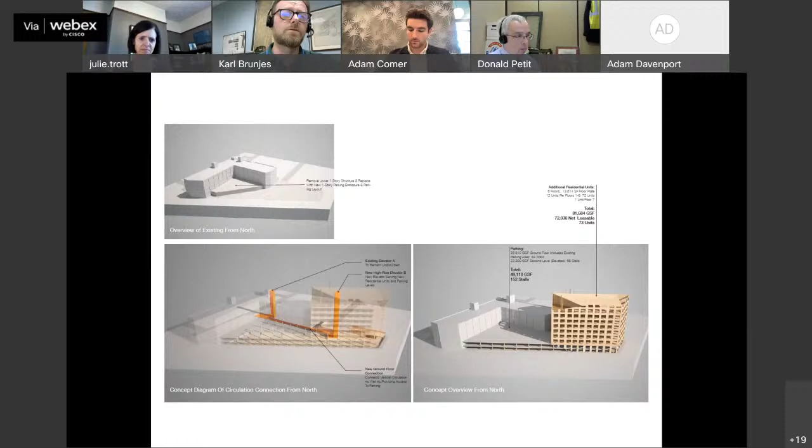Yes, Madam Chair, thank you. I believe there was some technical difficulty in emails, and we had requested additional comments, and there may be additional comments, and if we get them, we will share them as well. Since we are not taking action, it is something we can take into account later on. We will share all these with the applicants as well. I had responded to an email, but for some reason mine went into everybody's spam folders. So we are expecting to have more feedback on this project, but I think right now what we have is what's in there. And then I believe we also have a representative from Councilwoman Spencer's office in attendance as well.

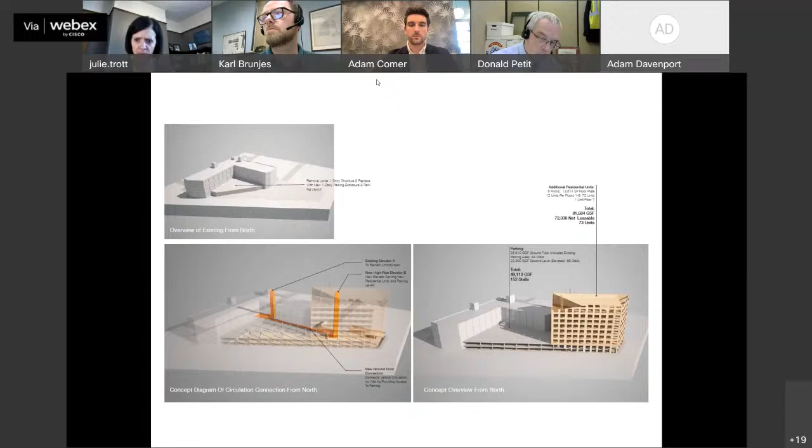Thank you, Karl. Then I will ask for the feedback from Councilwoman Spencer's office, and then we'll move on to commission feedback. Good morning, thank you very much. The council office is actually not prepared to make a statement this morning regarding this project. Okay, thank you for letting us know that.

We will then move on to commission and open the floor to the commission for questions and comments. Who would like to start us off? Mr. Brancatelli. Yes, thank you, Madam Chair. A couple of quick clarifying points. One of the questions that got raised was around parking. If we can clarify, they're providing more parking spaces than required.

That's correct. Yes, we're well over one-to-one parking with our current design. Thank you.

Mr. Brancatelli, other questions? Did we just lose him? Mr. Brancatelli? All right, looks like he, or maybe I am having technical difficulty because I can't see him or hear him. Sorry about that. I'm on Spectrum Cable and it goes out every once in a while. So can you hear me now? Yes. All right, thank you.

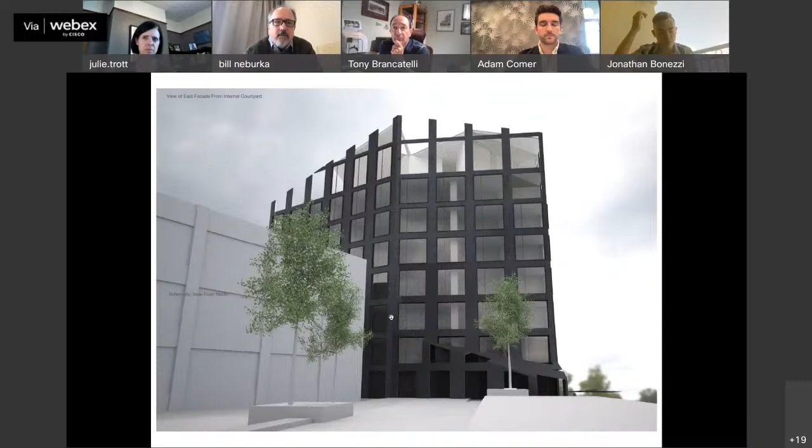Mr. Bonezzi: Thank you, Madam Chair. So I have about three things to ask. The first being, all parking is going to be served off of West 78th Street, if I'm reading your plan correctly. Yes, okay. I just wanted to address the neighborhood's concern of an increase of street traffic on 76th Street, but it looks like the way you're approaching it would force everyone to go into the back off 78th.

The second part I wanted to acknowledge is I do like the very Miesian approach to the building, and also the deconstructed frame when you reach the top parapet part—it lets the building dissolve into the air. One thing I'd push you to look at is the resolution of some of the angles where you're slicing that frame out. There are one or two pieces where I noticed hyper-thin slivers, so make sure those details are actually applicable as you move forward in your design process.

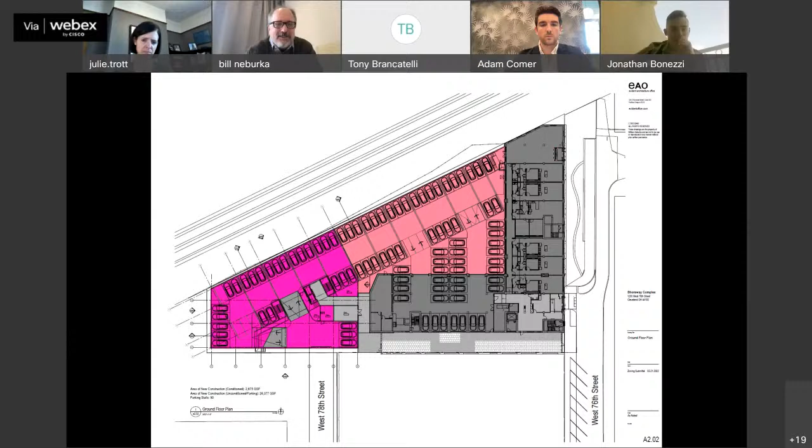Sure. We're just trying to make contractors uncomfortable at the moment—that's our main goal. I know the feeling, that's everything I design makes people uncomfortable.

The only other part I'd push you to look at is the proportions of the openings you're creating right now. The warehouse typically has about a 1 to 1.5 ratio, wider than it is tall, and the ratio of your squares is coming out more square. I think dialing that in closer to the formal relationship of the warehouse building next to you, even though materially you're taking a very modern contemporary approach, could help tie the two together. I think it's something that could be studied, but I can't argue it's a very handsome minimalist building—it does feel very warehousey. I commend you for taking that clean, Miesian approach, and I look forward to seeing you resolve these details and bring higher fidelity to the project.

So that's going to be my only comment for now. Thank you, Madam Chair, and thank you to the applicant.

Thank you, Mr. Bonezzi. Mr. Strickland? Thank you, Madam Chair. I commend the architect and the developer. I think the proposed design of the building addition integrates effectively with the historic nature of the existing structure.

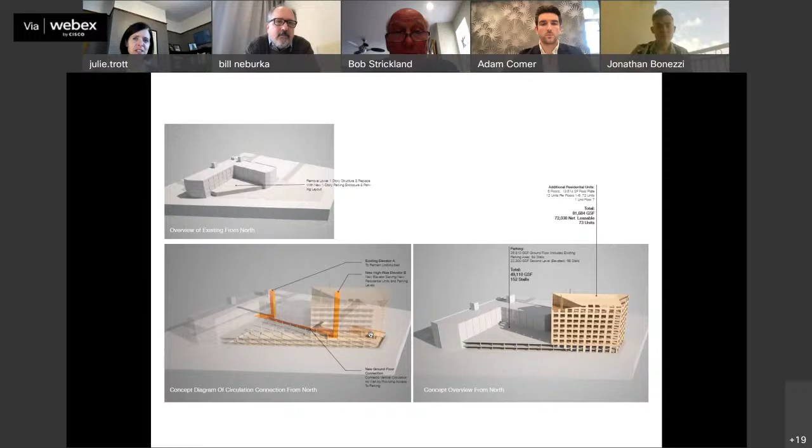I do agree with Mr. Bonezzi's comments, just on the proportions. In spirit, I know you're trying to relate to the warehouse context, but the proportions of your windows fight it a little bit, and don't allow it to blend in as well as I think you'd like. As you resolve the design, look at whether it would make sense to adjust the proportions some. The simplicity is beautiful, and as Mr. Bonezzi said, trying to be honest about how it relates to the context is always great to continue to look at.

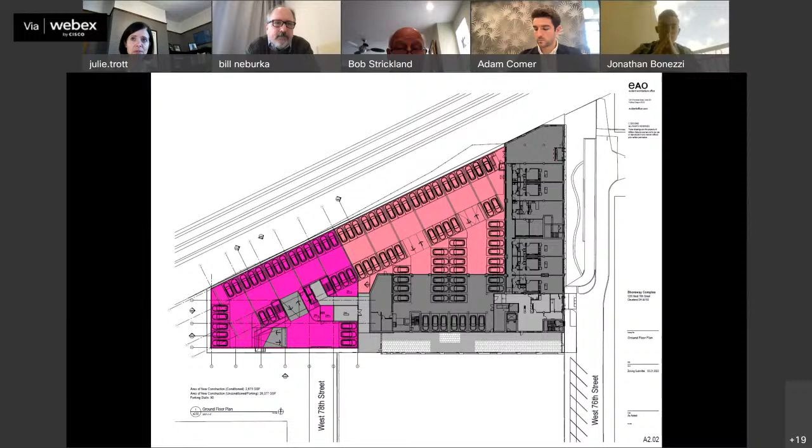And then the access off of 78th Street, I think, makes sense, and really encouraging and reinforcing that is something that, as you complete the design, would be good to resolve for deliveries and so forth, because I don't see a loading zone. It seems like you're using every aspect of your podium dedicated to parking itself versus a delivery zone.

Speaking to the stormwater or sewer pipe running underneath the site, we're looking at options for that. There may be a bit more of a setback on the south and west to accommodate a relocation. We would need to provide an easement, but we could still pave those areas if we needed to.

So those could be your dedicated move-in zones, correct? Correct, for both things. Because they would then have access to the west end of that causeway that connects all the buildings. That might be a nicer place to park a truck than on 76th, because it's so congested down there. Absolutely.

I think those are all my comments at this time. Other questions or comments from the commission? Ms. Anderson? Thank you, Madam Chair.

I think development of this site is a good thing. It's a wonderful area, beautiful views. People have easy access to all the great things in Gordon Square. I like the fact that you are mimicking the general grid window configuration of the surrounding warehouse type buildings. I do agree with Mr. Bonezzi and Mr. Strickland's comments about the dimensions of the windows, if they could be more horizontal.

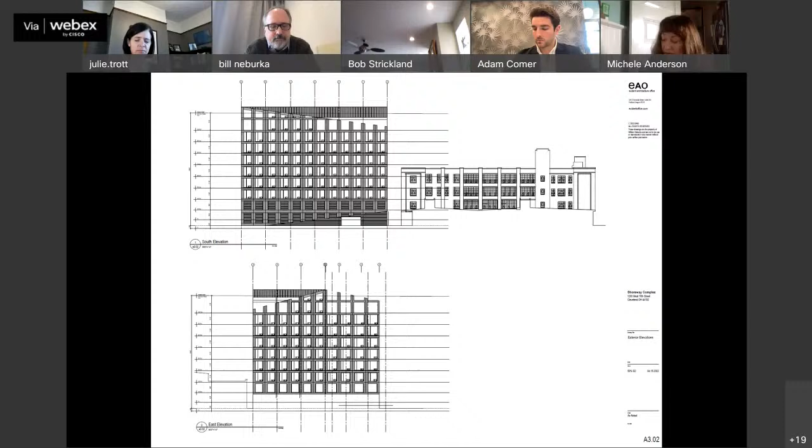Thank you, Ms. Anderson. Other questions or comments from the commission? All right, does the applicant, since this is a conceptual review only, feel like you received enough feedback from the commission to continue the development of your design?

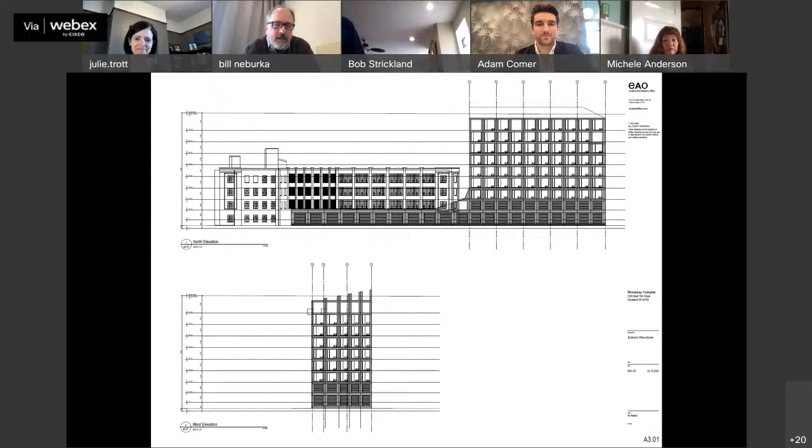I do, speaking for the design team, I do. Certainly, yeah, and we absolutely appreciate this feedback. This is helpful as we continue forward. Excellent, well then we look forward to seeing you come back to see us in the future with your final design. Thank you. Thank you, Madam Chair. Thank you to the commission.

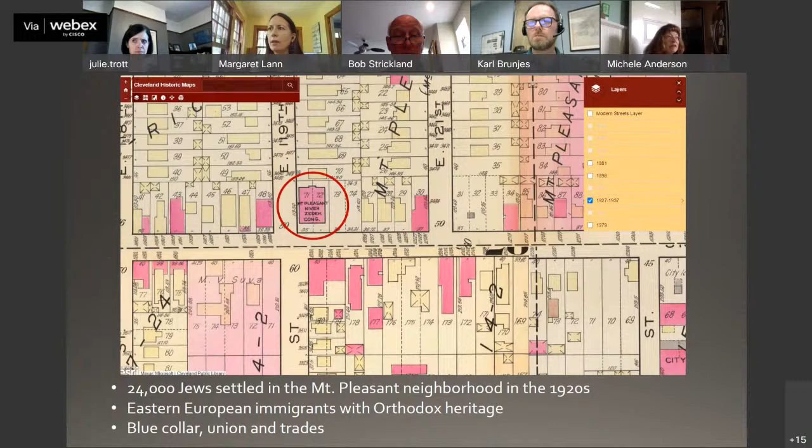Here is a historic plat map showing the position of the building within the neighborhood. Mount Pleasant was rapidly growing as a Jewish enclave, with about 24,000 residents at the time this was constructed. Glenville was also growing as the Jewish population migrated out of the Central and Woodland neighborhoods. Glenville was known as the upper middle class residence for the Jewish population, whereas Mount Pleasant was attracting a lot of blue collar and tradespeople, and many of these ethnic populations were retaining their Orthodox heritage, as Nevi Zedek did.

Just for a little bit of neighborhood current context, you can see that a lot of the historic fabric that had existed in the earlier map has been lost. But Second Tabernacle obviously remains as an anchor at the corner there of East 119th and Union.

The building was designed by a Polish immigrant architect, Meyer Altschuld. Altschuld was quite prolific in designing a number of apartment buildings and commercial buildings between 1914 and 1951. He also designed a couple of other synagogues and the Jewish bathhouse on Morrison Avenue. Pictured here are two of the remaining structures that still stand today.

Like many of the Jewish congregations, Nevi Zedek continued its migration eastward in 1957 when it merged with another Orthodox congregation and moved to Cleveland Heights. At this point, the building was sold to Second Tabernacle Baptist. Their congregation started in Cleveland in 1939 and was located in the Kinsman neighborhood prior to their purchase of this structure. As many of us know, due to redlining and systemic racist practices, the African-American population lived alongside Cleveland's Jewish population in many of the neighborhoods. As the Jewish population migrated eastward, that was an opportunity for the Black population to purchase these buildings and make them their own. This is a pattern that we see here and throughout the city.

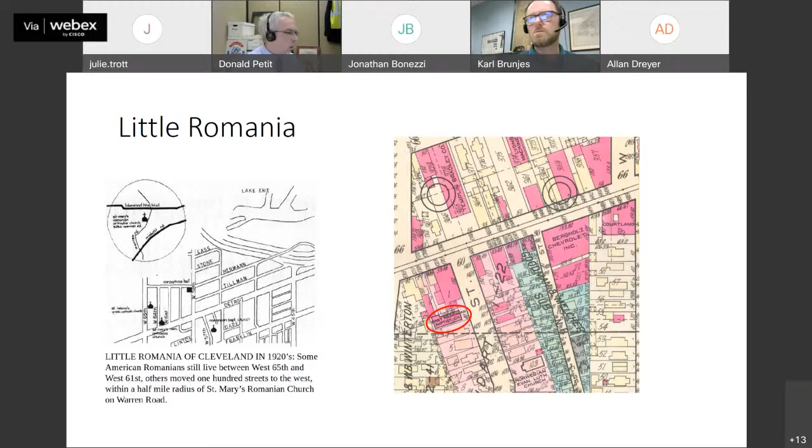The Romanian Baptist Church was organized in 1910, one of the earliest in the United States. The first one was done in Cincinnati at about the same time. Our missionary was here in Cleveland, preaching to Jewish members as well. There were 6 members who started receiving their services in Romanian at a different church nearby, and then they came together and started to form this parish.

The minister was also preaching in Akron, and he brought in another person, Mr. Fark, to assist in developing this, so he wasn't spread too thin. Back in those days, traveling between Cleveland and Akron took much longer than it does today. Then Gradis was called to be pastor of the Akron Romanian Baptist Church in 1914, so Fark took over leadership of this congregation and it grew. A new church was planned, and Fark had congregations on both the east and west side of the city.

The land for the church was obtained through donation, but construction was delayed due to the outbreak of World War I. The architect who designed this was John H. Graham, who designed many buildings in the greater Cleveland area, including out in Shaker Heights, Cleveland Heights, and the Film Exchange building, which is a designated Cleveland landmark as well.

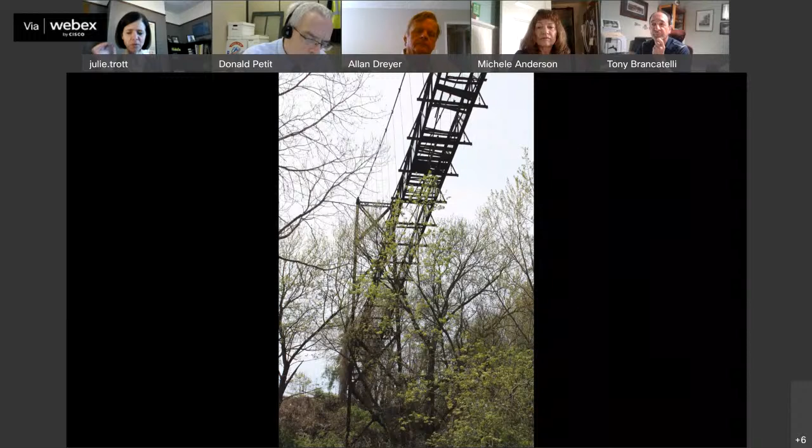Okay, other questions or comments from the commission? Or would someone like to make a motion? I would make a motion for the nomination. Thank you for the motion. Do we have a second? We only have a few of us here, so we need somebody to make it.

I'll second that motion. Thank you, Ms. Anderson. We have a motion, we have a second. Any further discussion? All right, Mr. Petit, please call roll.

Ms. Anderson, yes. Mr. Bonezzi, yes. Mr. Brancatelli, yes. Mr. Dreyer, yes. Mr. Tarasik, yes. Ms. Trott, yes. The motion passes unanimously. Let me restate that: the motion to recommend approval by the State Preservation Board passes unanimously.

We're not nominating it today. Thank you. That concludes our nominations portion. Administrative reports.

I just want to remind the commission that we have a special meeting on June 3rd with the Planning Commission to take final action on the Sherwin-Williams headquarters project. The chairwoman won't be with us, but hopefully all of you can make it. I believe the agendas went out yesterday. The presentation will soon be available as well, but we're just acting on the outstanding issues next week.